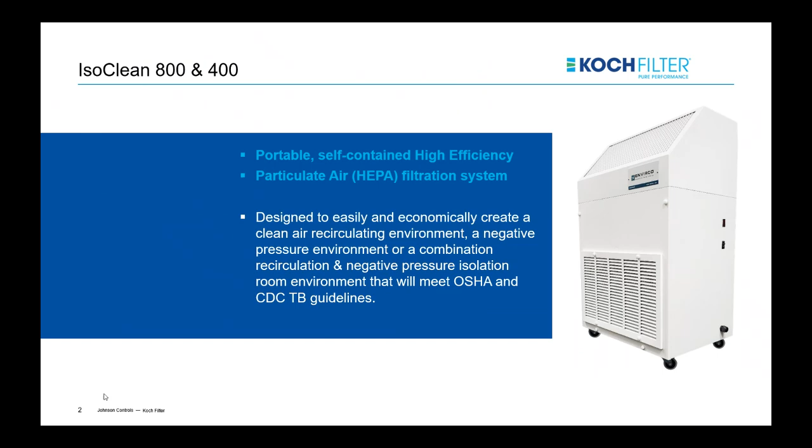We'll focus right now on the IsoClean 800 with some of the standard features and benefits. It comes with flexible configurations: a clean air recirculating unit, a negative pressure unit, and the combination. The great thing about this unit is it is a low cost for an isolation room. It comes with 3 speed adjustable airflows and a powerful motor. It can go anywhere from 560 to 800 CFM, and the CFM will depend on the size of the room and how much CFM you need to be pushing through the unit.

A feature of the IsoClean 800 is it provides up to 24 room air changes per hour, and that's given on an 18 by 12 by 8 foot room, as you see here on the screen. The units are equipped with a pre-filter and a 99.99 HEPA filter, and the HEPA filter is a true HEPA filter that meets the requirements at 0.3 microns.

The unit is simple maintenance and comes with an accessible filter. On the bottom of the unit, you see the grill there. That's where the pre-filter is located, so that's easily interchanged. We recommend checking that on a quarterly basis and changing those out to prevent the larger particulate from getting into the HEPA filter, which we want to protect as much

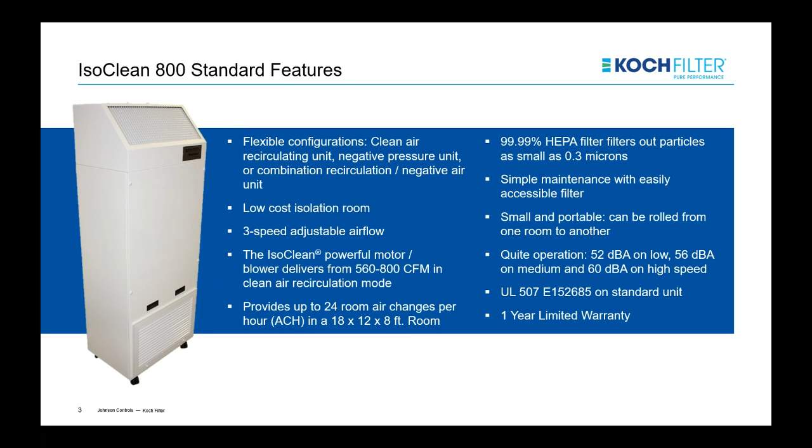Now, a key to having this really run as a true HEPA filtration unit is you want to make sure that the room is sealed as tight as possible. You don't want a lot of leaks. I know there may be some, but in order for it to truly work as a HEPA filtration unit, you want that room sealed as tight as possible. Again, within that room you will get 24 room changes per hour, which exceeds the CDC and ASHRAE recommendation of 3 to 6 changes per hour.

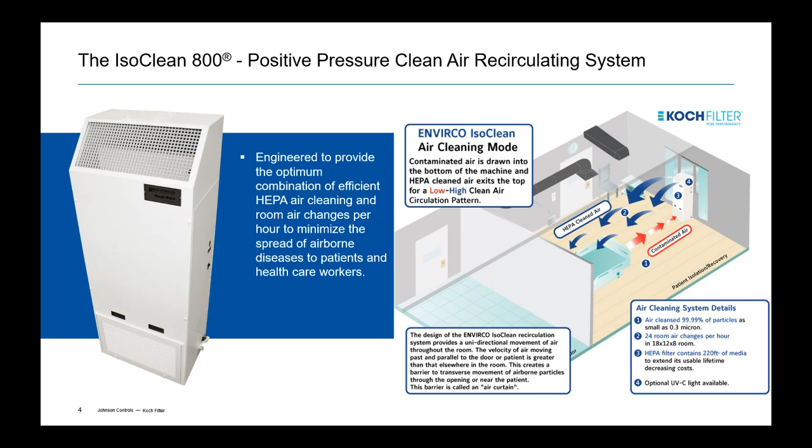Next slide. Another feature of this IsoClean 800 unit is it can be used for negative pressure rooms. You can replace the existing grill, as you see at the top, put in the 8-inch ducted collar, and have 100% of the unit exhaust outside the room, which creates the negative air pressure.

So it can be either ducted out through a window, or if there's a vent within the room, you would hook the duct up to that and exhaust the air out the window or through a wall. You're still using the same methodology of pulling the air through the bottom of the unit. It goes through the HEPA filtration and then out the window or the flex duct or the wall that you have pre-established.

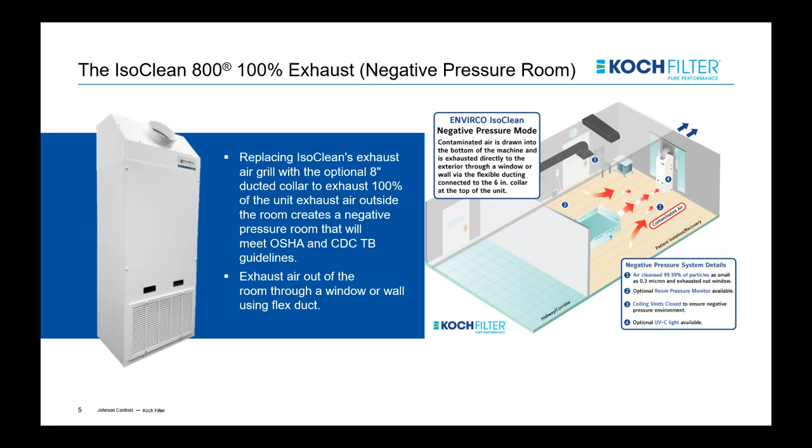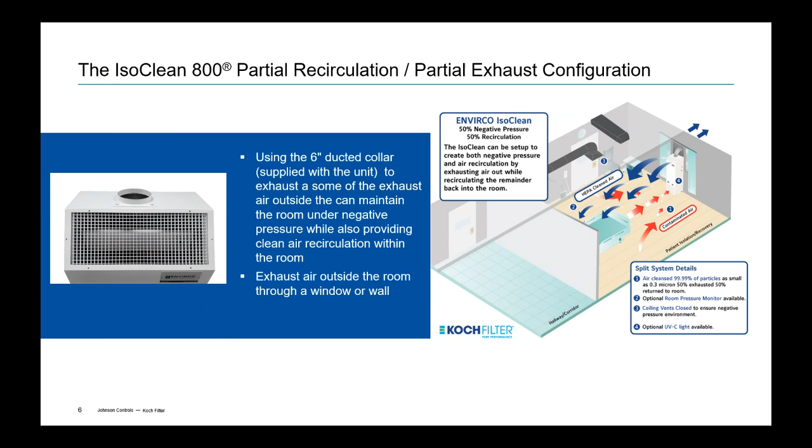So partial recirculation and partial exhaust, the concepts really don't change as much, except it's being used as 50% negative pressure, 50% recirculation. It can be set up to create both the negative and the air circulation as you see in this graph. So here we would take the ductwork and it's still going out the wall or a window, and you're still, again, pulling the air through the bottom of the pre-filter into the HEPA filter, and the clean air is coming back into the room.

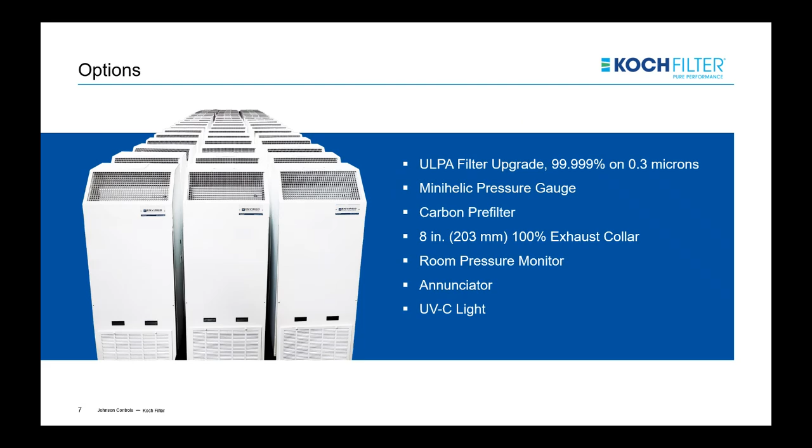Again, some other benefits here. You can upgrade the HEPA filter to a ULPA filter, 99.999 on 0.3 microns. You can have a Minihelic pressure gauge that shows when the filter should be changed, shows airflow. You can remove the pre-filter and put a carbon filter in if there's any odor issues. Room pressure monitor, and they can come equipped with UV lighting.

As we discussed before, it is a UL listed product, which we find very important in our industry. There could be products out there that were not UL tested and may not perform, and probably will not perform as well as our IsoClean 800. So please keep in mind all UL listings are important, especially for the hospital manufacturing facilities.

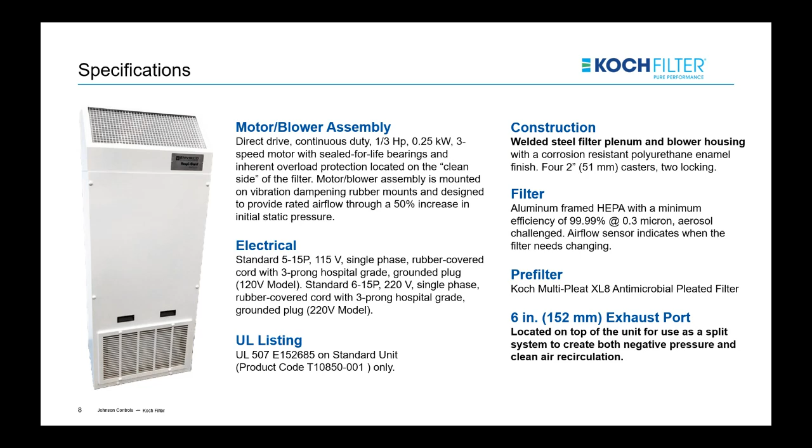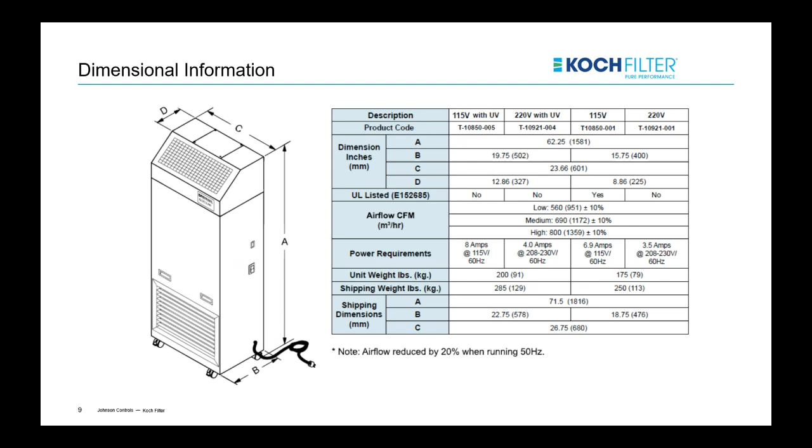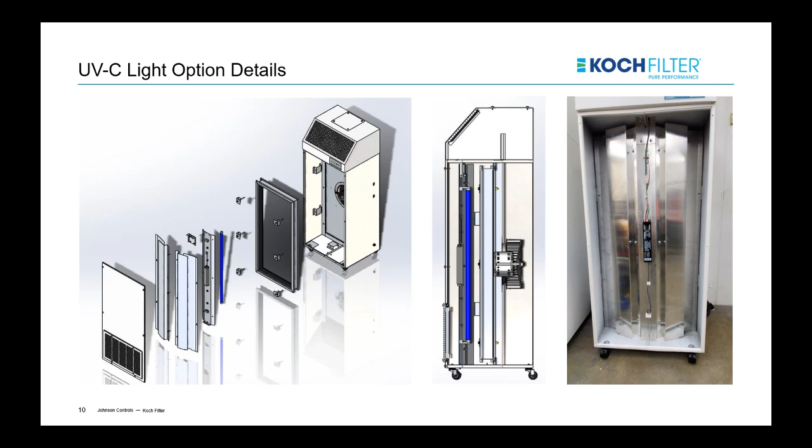Ed, do we have any questions on the 800 real quick before we move to the 400 that we can discuss? I'm not seeing any right now, so I'll watch the chat, and if anybody has a question, I'll... Okay, I think I see one.

One asked about the life of the HEPA filter. Typically on this HEPA filter, depending on how the unit is being used, we see anywhere from 3 to 5 years on the HEPA filter. Again, maintaining the pre-filter in a normal environment, you should be able to get 3 to 5 years on the HEPA filter.

And then another one, do you have examples of these individual applications? And we do on a different slide here. We'll get to some of the examples and the places that these have gone into.

Okay, we'll move forward on the IsoClean 400 unit that we just came out with. It's based obviously off the IsoClean 800 unit, but in a smaller version for smaller spaces, and is not as bulky as the IsoClean 800 unit. So again, this does come in a standard feature and also available with the UV lights. We have 3 installation configurations allowed for the IsoClean 400 as well. Both the recirculation and the negative pressure capability, as well as both.

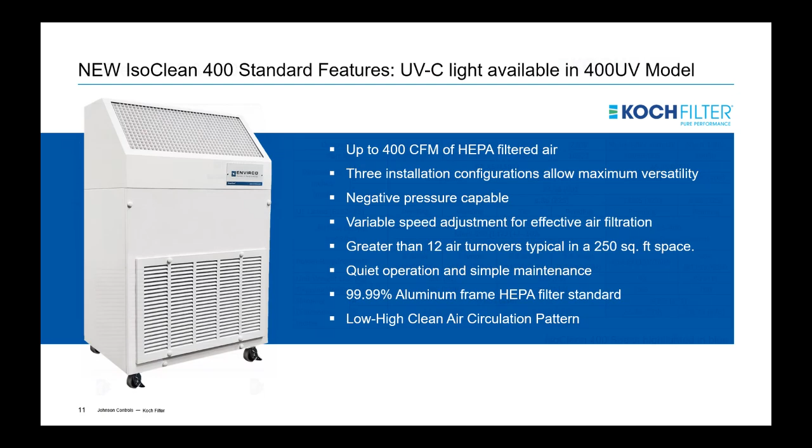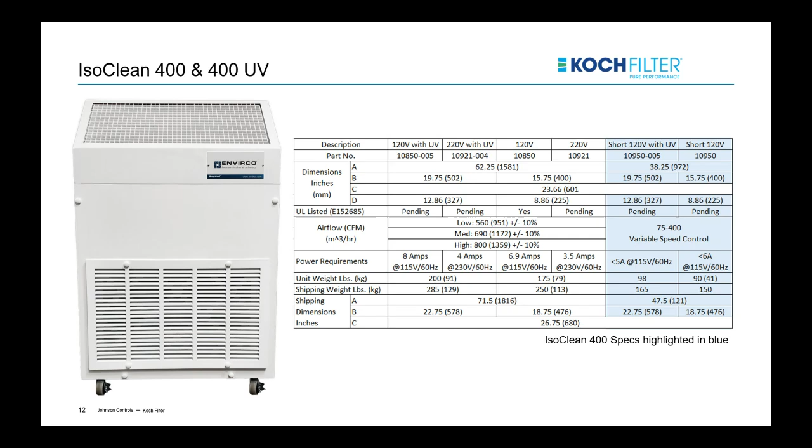The IsoClean units are shipped individually in a crate, and they ship directly out of our facility in Sanford, North Carolina. So they are protected and shipped via LTL. Mostly, obviously, we're not buying truckloads, although we wish you would and are happy to take those, but they are shipped and crated individually when shipped out.

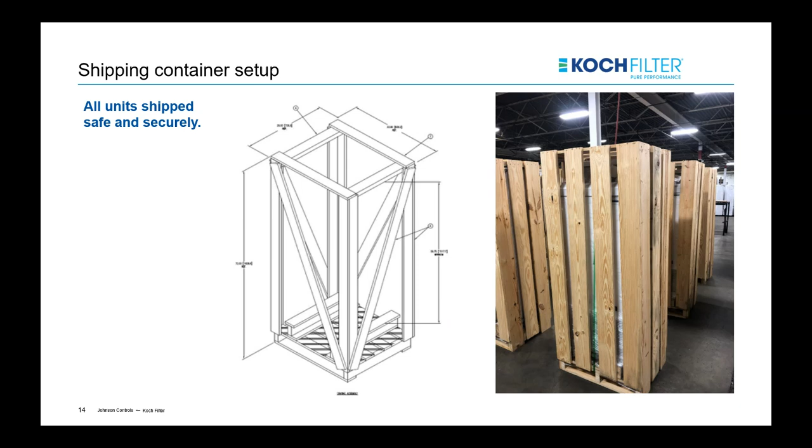I know this was a general overview, but we're going to look through the questions. Are there any other questions that we may be able to answer here? No, I'm just seeing our life of the HEPA and what application customers are mostly using this for.

So one question is, what are the benefits of the UV lighting? And Steve Snyder's on here, and correct me if I'm wrong, Steve, but it kills some of the smaller particulate that the HEPA filter may not be able to capture before it goes into the HEPA filter.

Steve? Yeah, that's right. So the bulb we're using, it emits UV light in the 254 nanometer wavelength, which is considered a germicidal bulb. It's not in the range that would create ozone, so there should be no concern about that. This is strictly a germicidal bulb. So when the HEPA filter captures and contains any kind of pathogens, you have the UV light there to also deactivate and kill whatever is captured. Great, thanks.